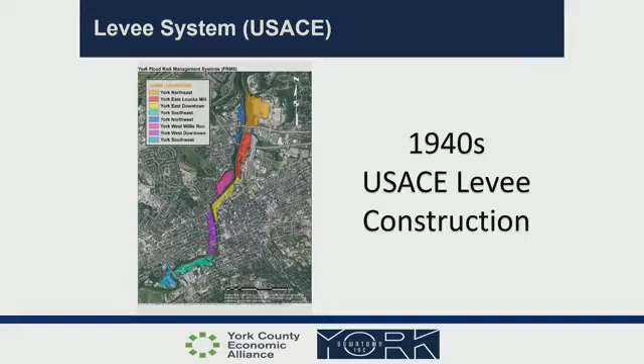And we didn't move forward at the time, and we've had a century now of flooding along the Codorus Creek. In 1933, we had Indian Rock Dam constructed above the city, which helped with some flooding issues. We also had the construction of a levee system, and so the Codorus through the city of York is controlled by the U.S. Army Corps of Engineers, which will come back as an issue when we talk about permitting because it's all under federal control.

And despite all that work, of course, we had Hurricane Agnes in the 70s that inundated a number of the neighborhoods in the downtown in the city.

The City of York also adopted a green action plan in 2017 that called for the greening of the Northwest Triangle and Lafayette Plaza. And really that has in some ways come to fruition with the development in the Northwest Triangle and the rail trail being completed through the area.

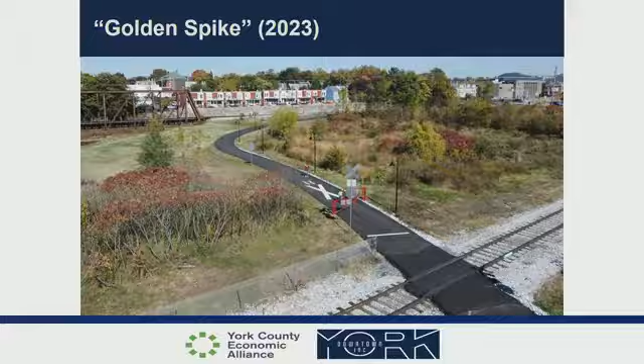We've invested in the rail trail along the east bank of the Codorus and completed the trail back in 2023 with the Golden Spike, which of course now will complement all the development happening there. And we have seen literally hundreds of millions of dollars of economic development along the corridor of the Codorus.

And we still continue to see significant runoff events without any of that sediment being captured. It goes into the Susquehanna River and then it goes down to the Chesapeake Bay, which contributes to all those issues down there.

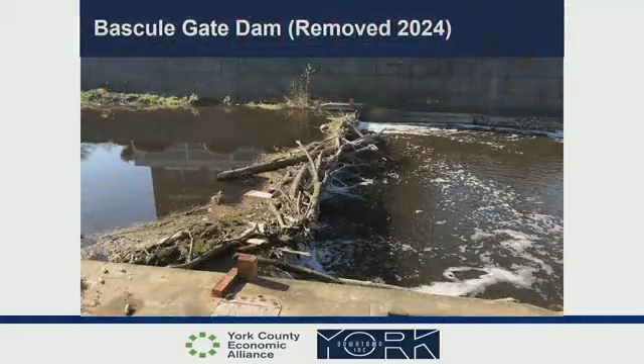And that's just fond memories of the Bascule Gate Dam before it was removed. I'll return to that in a second.

So about 7 or 8 years ago, we started working on a master plan for what would it look like to sort of fulfill that vision of a green, accessible, and attractive Codorus Creek.

And we envisioned this greenway that's 1.4 miles long, stretching from York College at Grantley and Bantz Park on the upstream end, and Wellspan Park and Kids Space on the downstream end, really connecting through all the neighborhoods of the city, as well as the downtown.

And like I said, this has already been a corridor for affordable housing development, market rate housing development, our history center, York College's investments, People's Bank Park, Wellspan Park, and other assets that have been built.

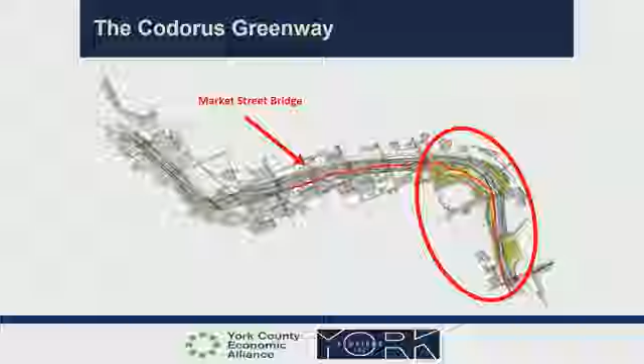And so in trying to bite off a piece that we could chew from this 1.4 mile project, we focused in on a phase one that's shown here in red. That would be the full build out of our Greenway vision from roughly Bantz Park down to College Avenue.

And the construction of a trail that will begin at Bantz Park and follow the west bank of the Codorus, and I'll show you some renderings of this in a moment, the whole way down to Foundry Plaza. So this would be the first phase of the project, and it would get us about a third of the overall Greenway project and more than half of the trail that we're envisioning.

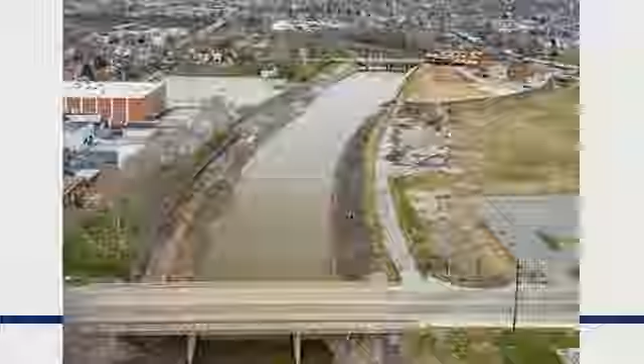So this is basically what this looks like today, although you would see at the top right, Knowledge Park now complete by York College, and the Dentsply property on the left. But you can see the crumbling walls, highly cut off from the surrounding community.

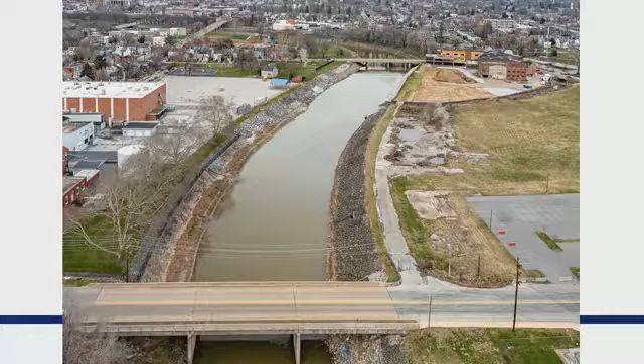What we're basically proposing is creating a low flow channel through the middle of the creek, which will speed up the velocity of the water, which is good for wildlife and fish, keeps it oxygenated. The vegetated buffers you're seeing on the side are still within the levee system, so every couple years when the water comes up, instead of all that sediment going down the Susquehanna River, it gets absorbed into these riparian buffers. So there's a water quality element.

On the left, you can see the trail construction that'll begin at Bantz and continue downstream. We're actually moving the trail up to the top of the bank because when this rendering was done, we didn't have a new owner of the Dentsply property. We do now, and so we're designing that in partnership with them.

I should note that there's a place we've been holding all throughout the design process to recreate Thaxton Park between the levee, top of the levee, and the new Homes at Thaxton. That's the green space that's being held there. We've been working with the city and the design firm that they hired to think about what will fit in there.

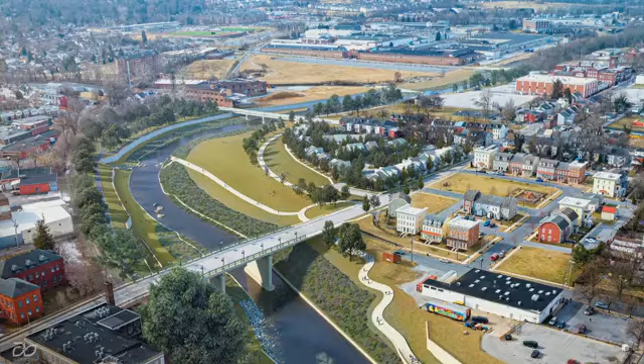This is just coming a little bit further downstream. This is King Street. So on the left is the Rabbit Transit facility, which we know is a destination for many people walking in the downtown. It's a way to get out of town into some of the grocery stores and other services. Again, no access to the creek's edge here.

The new West Bank Trail will come within the levee system. The switchback on the bottom right would get people from that new trail up to King Street to cross or to go to Logos there. And then it continues down off-screen the whole way to Foundry Plaza.

So in effect, that is phase one. As part of some of the federal funding we've received for the project, we had to quantify some of the benefits of the project because they want to know that their federal investment will pay off locally. So we were able to estimate about $190 million in benefit over 20 years. And unlike most economic projections, this doesn't include the value of construction or temporary job creation.

These are primarily stats from the Department of Transportation, because getting people off city streets and onto a multimodal bike trail actually prevents vehicular pedestrian conflict and death and injury. So they were able to look back over time to local streets and see how many people had been hit by cars and injured or killed, and then actually project out what the safety benefits would be if people had a more walkable backbone to get between all these different assets.

The stormwater benefits are also pretty substantial - up to 16% of York County's overall sediment reduction goals can be met by this project alone. It's also really important that we have these multimodal connections because in the census tracts adjacent to the first phase of this project, around 27% of households don't have access to a personal vehicle. So foot and bicycle traffic is how most people are getting around, and this trail would connect them to a bunch of different things along the Codorus.

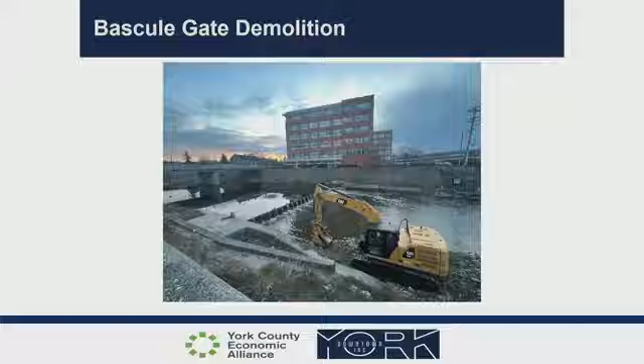This is just some images of the Bascule Gate Dam. Everybody remembers what that looked like before - it was stuck in an upright position, and it sort of was a sieve for debris coming down the creek. We actually had to enter the creek and build cofferdams to isolate the dam. That's from the Commerce Center looking down on it.

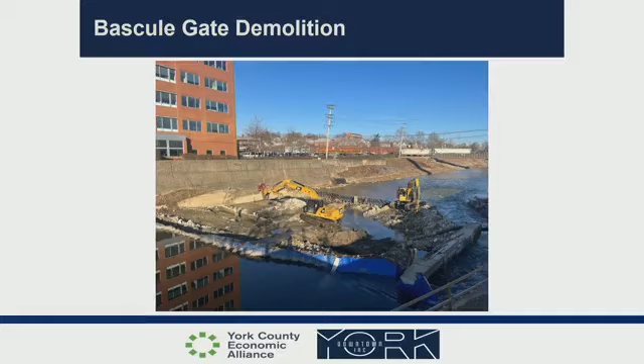We had to de-water portions of the creek and bypass it to get the excavators in there to remove the foundation of the dam. This is the before, and this is the after. We're really happy with how it looks - so much clearer. The water temperature has dropped, which is great for the fish and wildlife.

And the river keeper, who does all the litter cleanups and everything, has been able to get to a lot more litter than they've ever been able to get to before because the water level dropped a little bit.

So we have been hyper-focused on construction, design and engineering, and permitting. There's a bunch of other stuff we have been doing in parallel to that. We're raising funding to do a maintenance endowment so that we can pay folks to come in and maintain the final product. We are looking at ways to deploy our Bloom Business Empowerment Center funding to businesses or potential entrepreneurs in the neighborhoods around phase one, so that as people come into the community and get to experience the Greenway, they also can hopefully spend money at local businesses.

We've worked with Crispus Attucks for a couple years now on the Codorus Enrichment Program led by Eric Kirkland, and that is expanding in the coming years. And of course there's lots and lots of opportunities for art and micro parks and a bunch of other things. But honestly, those are kind of the fun things we get to worry about after we get to construction and build phase one. And that's my whirlwind update on seven years of work.

So we're closer than we ever have before, but we know from past experience we're kind of in others' hands when it comes to permitting.